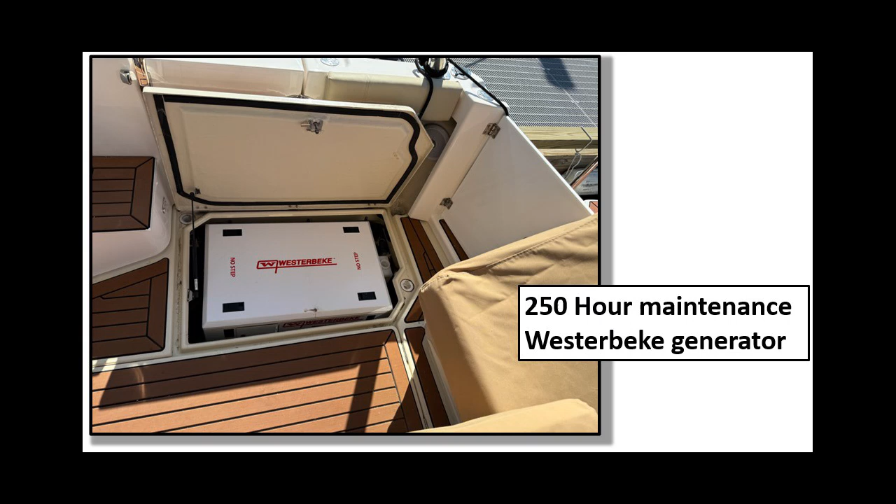We recently did the 250-hour maintenance on our generator. This video shows how to change the fuel and oil filters. It's a fairly straightforward process that only took a couple of hours.

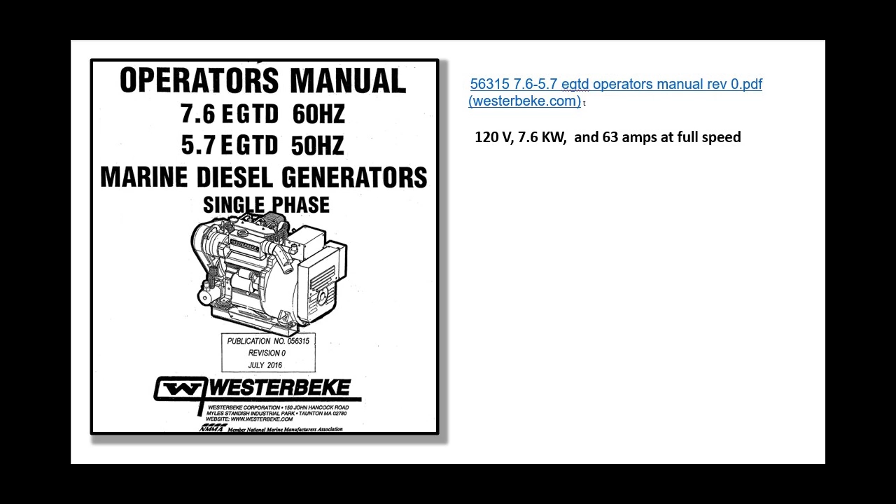The Ranger Tug R43 model is equipped with a Westerbeke 7.6 kilowatt generator. We use our generator quite frequently, mainly to run the gyro system, which we do when we're underway and the waves kick up a bit.

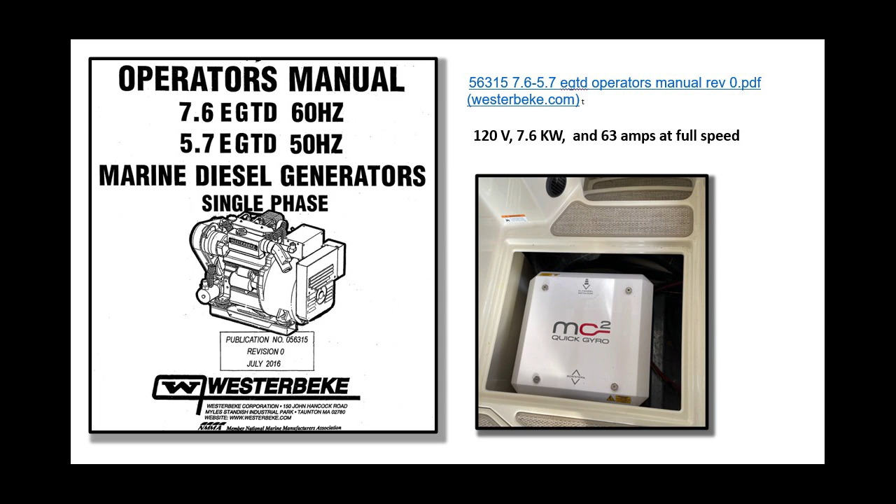We're on the third maintenance cycle for the generator, the 50, the 100, and now the generator has 230 hours, but it's been a year since the last oil change, so we're doing the 250-hour service now.

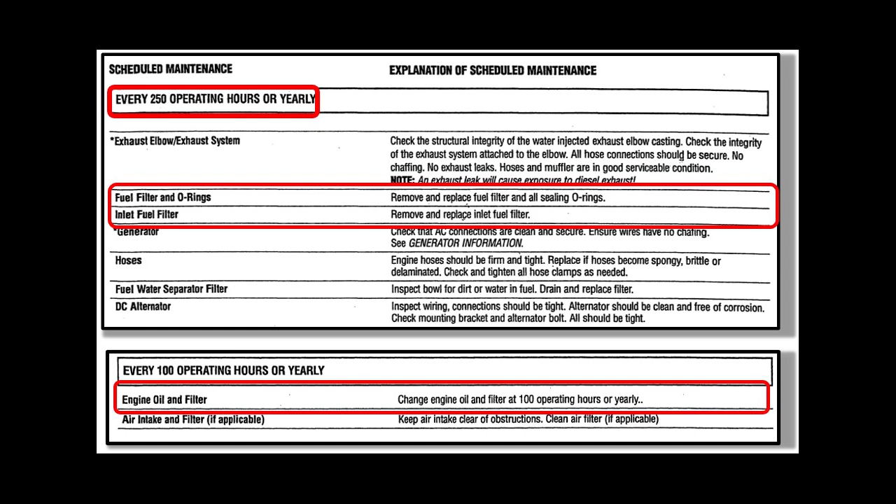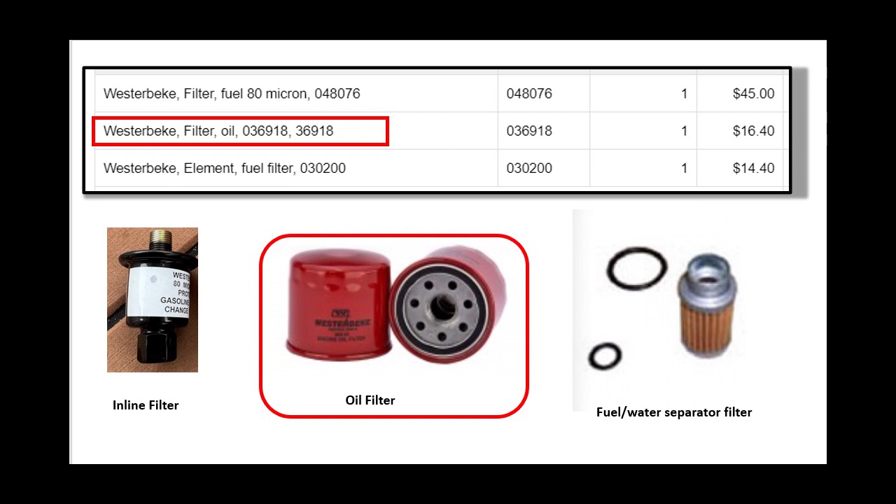There are 3 items on the generator itself that need replacing, plus another fuel filter next to the fuel tank. The first one is a small inline filter, 80 micron filter. The next item is just a standard oil filter designed for the Westerbeke unit. And the last item is the filter element for the fuel-water separator.

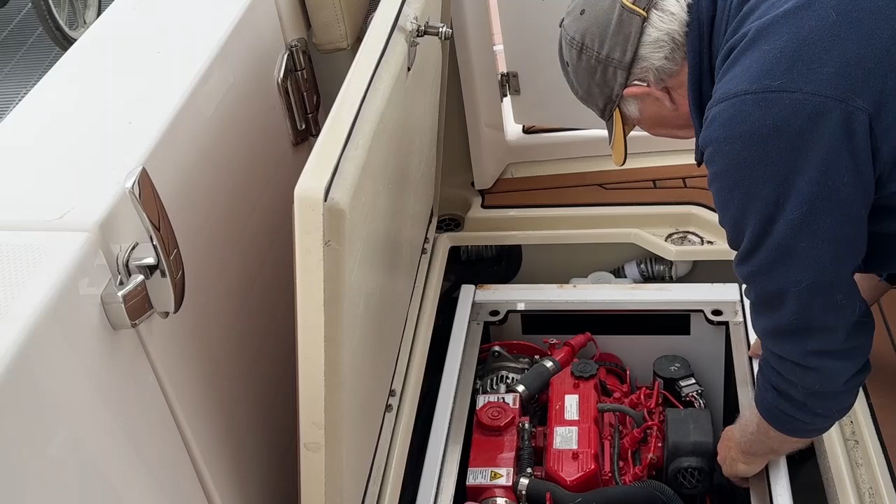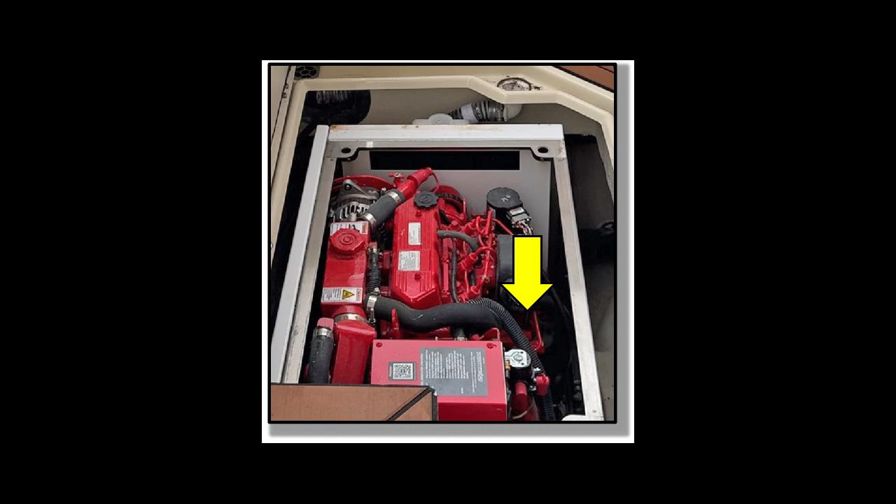The generator is located in the starboard lazarette. Open up that hatch and then start by removing the top and side covers of the generator enclosure. The components to be replaced are located on the inboard side of the generator. Access is not too bad. I found that pretty much all the work could be done through the lazarette hatch without opening up the engine hatches. Here are the 3 components, conveniently located close together on the side of the unit.

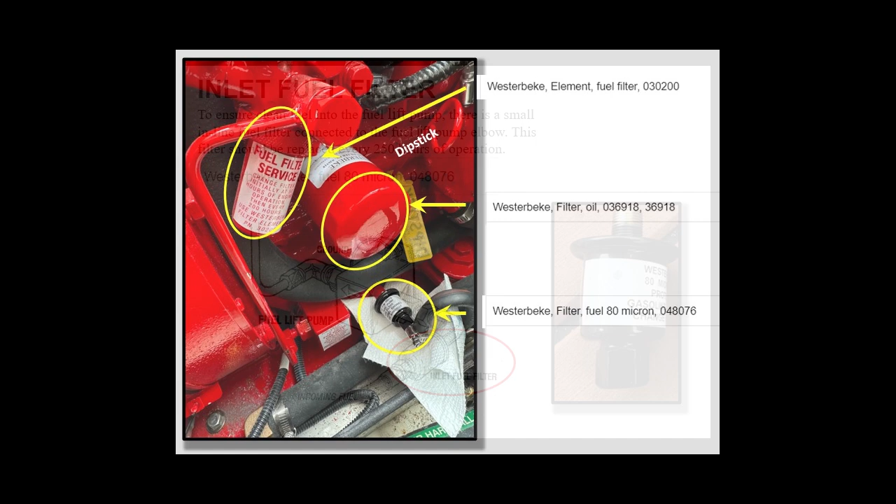The first item I change is the inline fuel filter. This is an 80 micron filter.

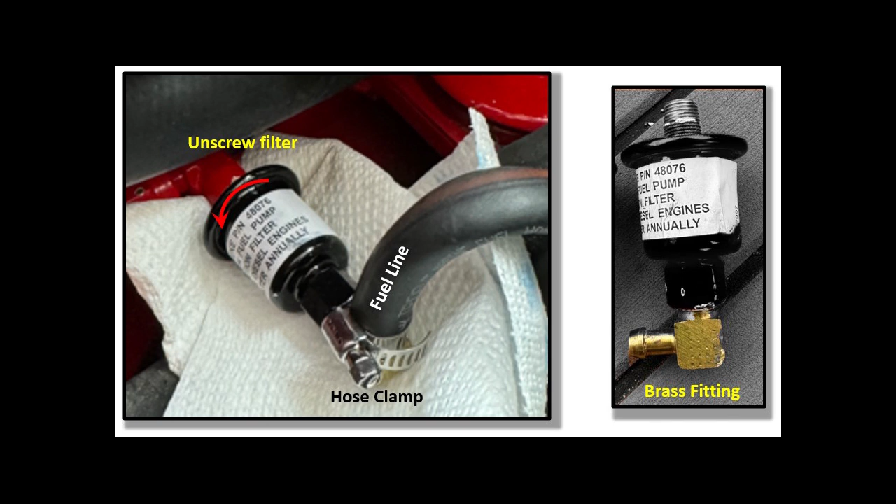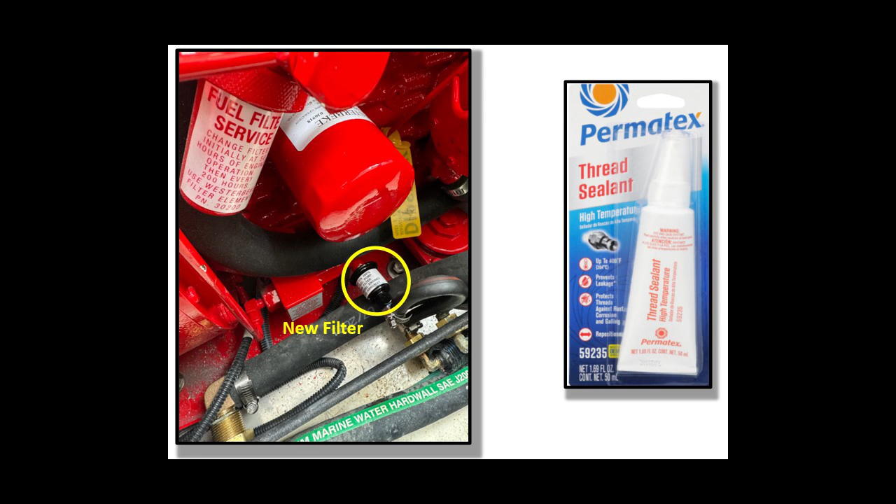To replace this filter, the first thing we're going to do is loosen the hose clamp that secures the fuel line to the filter. Then we remove that fuel line from the brass fitting that's on the end of the filter, and then we go ahead and unscrew the filter from the lift pump. Now take the brass fitting off the old filter and thread it onto the new filter, and screw the filter into the fuel lift pump, and then reattach the fuel line and tighten the hose clamp. I also use some thread sealant on both the threaded connections.

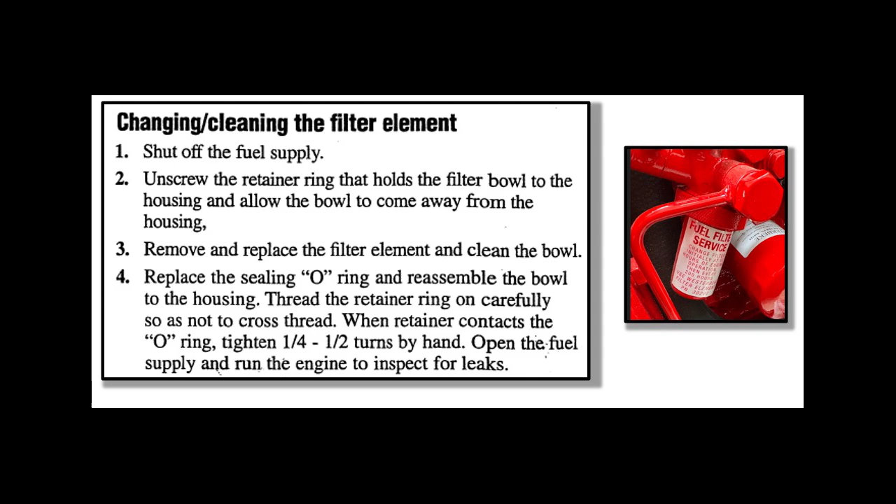The next item on the list is the filter cartridge for the fuel-water separator. This is the procedure that I've copied from the manual. The only thing I didn't do is I did not shut off the fuel supply, which was probably all right. I got very little fuel spillage when I was changing out this cartridge.

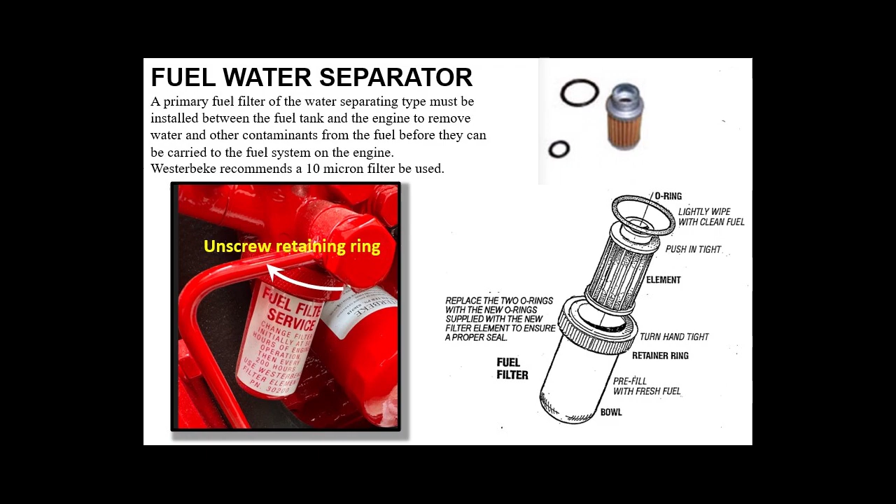The first step is to unscrew the retainer ring. Once that's loose, then you can remove the bowl. Next, remove the old filter, and then install the new filter. Put the small O-ring inside of that.

The replacement kit also comes with a large O-ring, which sits in a channel on the housing. I had to gently pry this old O-ring out with a thin screwdriver, and then replaced it with the new ring after lightly wiping it down with some clean fuel.

The next thing is to put the new filter element in the bowl, and then fill that bowl with fresh fuel, and screw the assembly back onto the fuel pump, just hand tight. After that, I then ran the generator for a couple of minutes to check for leaks, and also to warm up the oil for the next step.

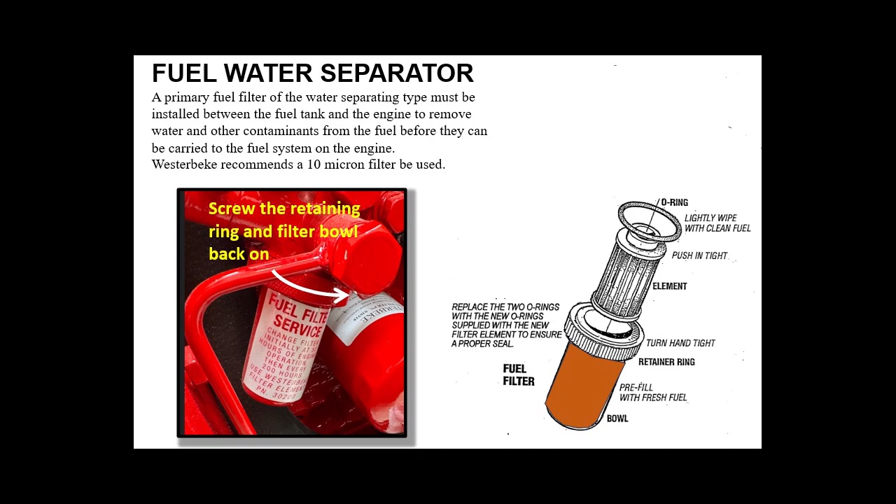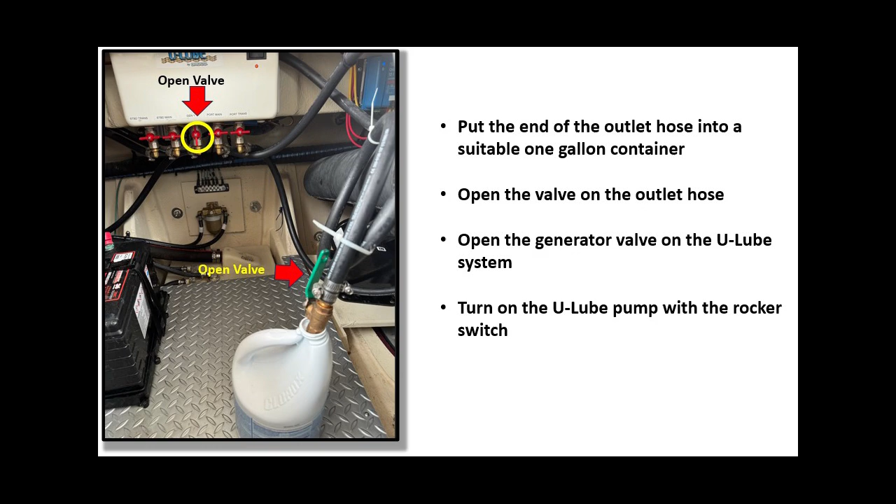To extract the old oil, we're going to put the end of the outlet hose into a suitable 1-gallon container, and then open the valve on that outlet hose. Then we go back to the U-lube system, open the generator valve, and click on that rocker switch. The process is pretty fast - it only took a minute or so to empty all the oil out of the generator. Of course, it's only about 3 quarts.

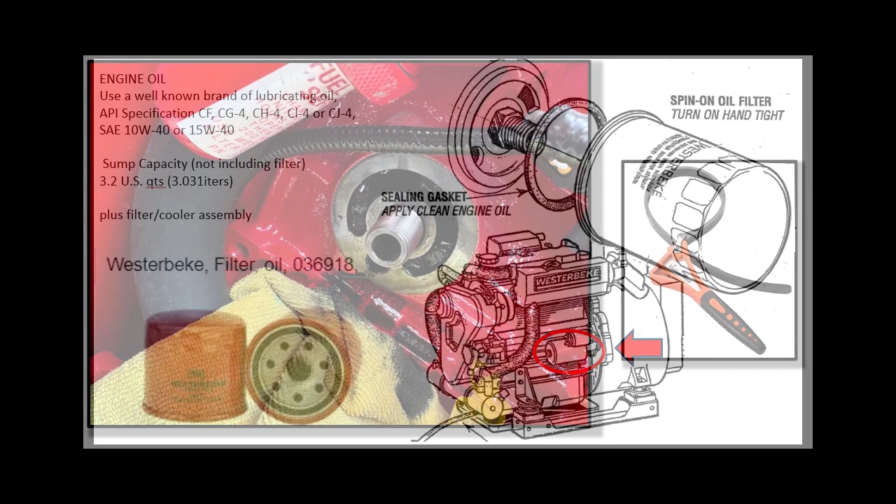After removing the old oil, now we're going to replace the oil filter. To take off the old filter, I just used a small strap wrench. A little bit of oil leaked out in the process, but I had a rag underneath and I caught most of it. So after this picture was taken, I wiped down this area, put some clean oil on the filter gasket, and then spun the new filter back on.

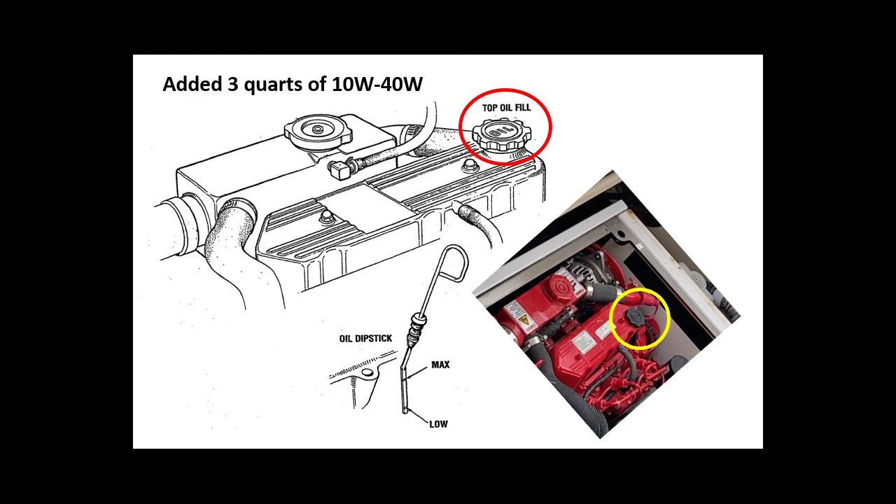After changing the filter, I added 3 quarts of 10W40 oil, then ran the generator for a few minutes again to check for leaks. After that was done, I let the generator cool down a little bit. The oil level on the dipstick was pretty close to the max level mark, just a little under.

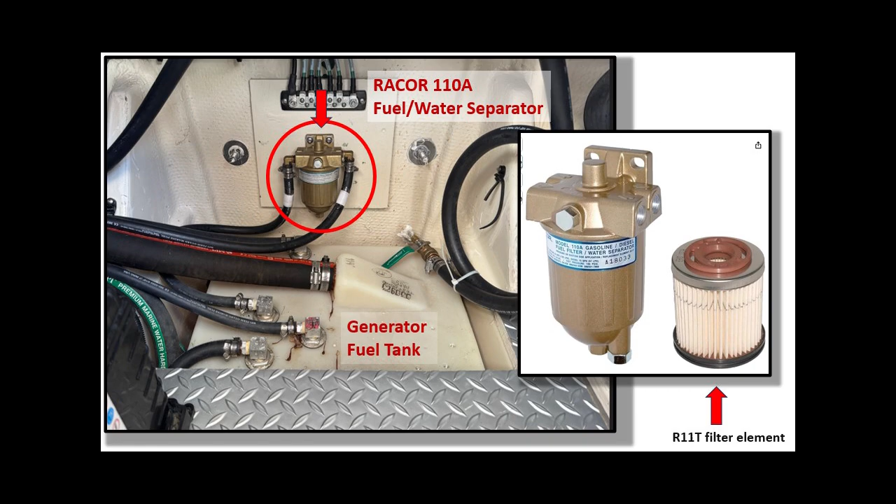The last filter we're going to change is located in the central engine compartment, mounted on the transom above the generator fuel tank. It's the filter cartridge for the Racor 110A, and the part number is the R11T filter.

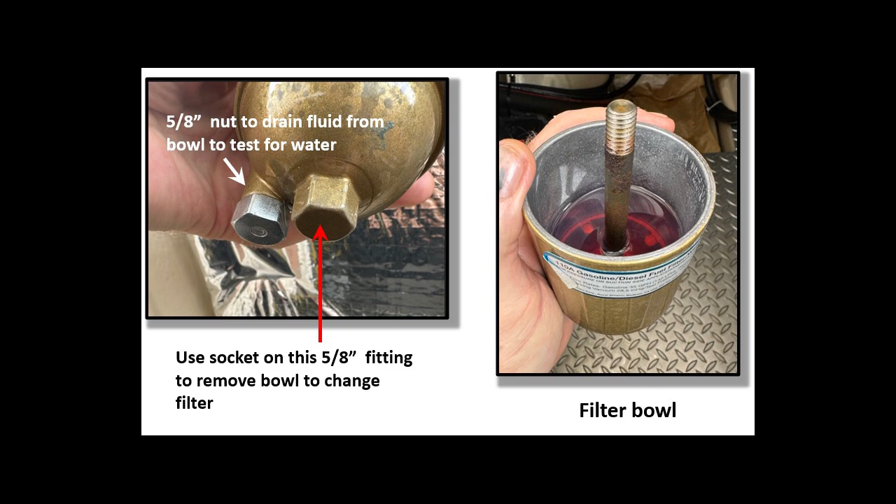On the bottom of the aluminum filter bowl are 2 5/8-inch fittings. The silver one is a plug, used to drain the bowl to check for water. And the brass colored one is the bolt that attaches the bowl to the upper housing.

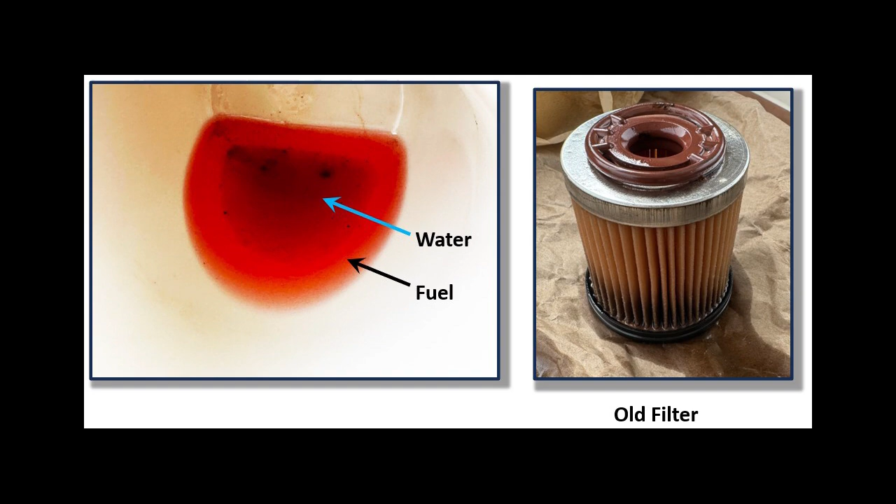The old filter definitely looks like it needs replacing. I did find also a small amount of water in the bottom of the bowl, maybe a tablespoon's worth. The old filter was replaced. I added some fresh fuel to the bowl and then reattached the bowl to the housing, which completes the project.